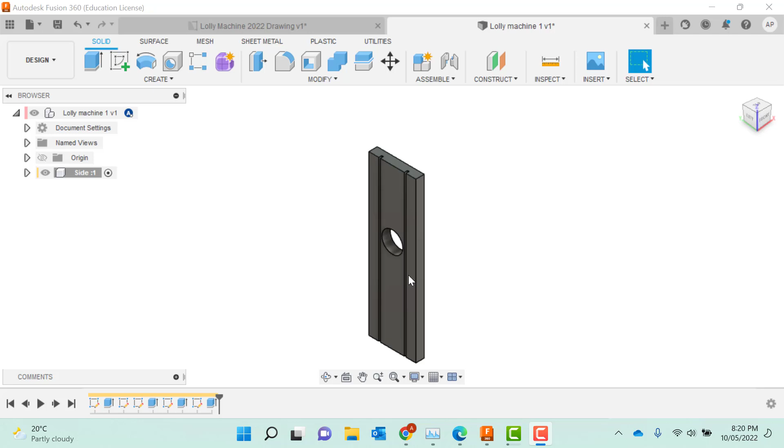Right, now that we've drawn this side, we want to look at using the construct offset plane and then the create and mirror tool to draw this whole piece, the two sides.

To start with, we go to Construct, Offset Plane, and we select what face we want to base our offset plane from. We'll select the inside where the grooves are.

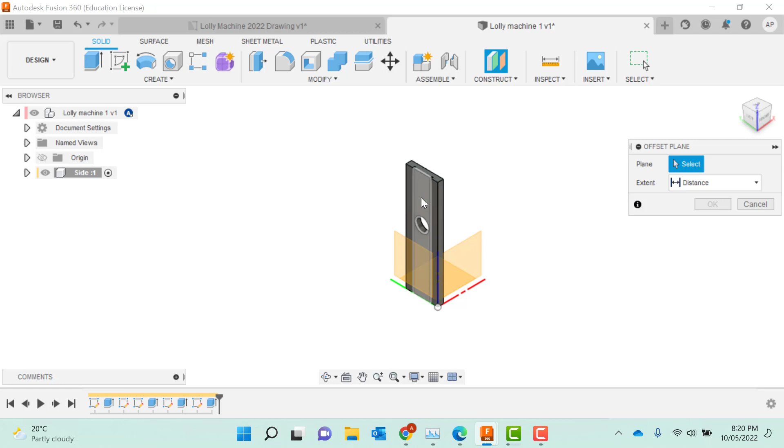Now the entire piece is going to be 200 mil. If we look at our drawing, from that edge to that edge is 200 millimeters. Some of these drawings have been moved around, so that may not show it clearly. But we know the two thicknesses of our job is 16 mil, so two 16 mil pieces is 32 millimeters together. 200 minus 32 brings us to 168 millimeters, and dividing that by 2 is 84. That's the calculation we need.

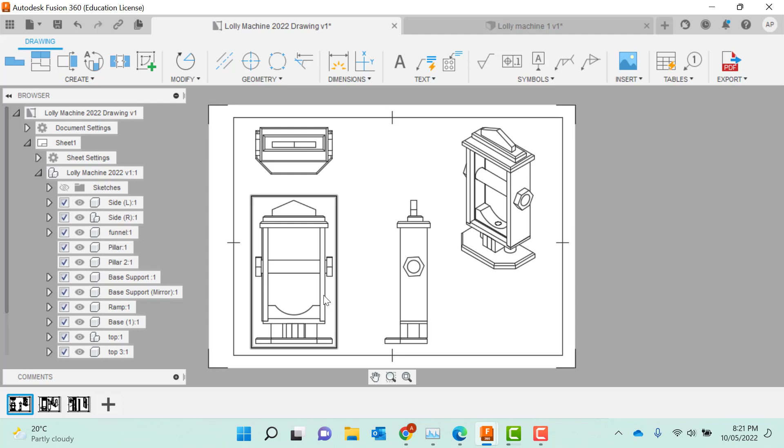So when you're drawing with Fusion, it's often handy to have a piece of paper next to you to work that out. With that, Control-Z, Construct the Offset Plane. I want to base it off that face, and I want it to be 84 millimeters away. We'll say OK.

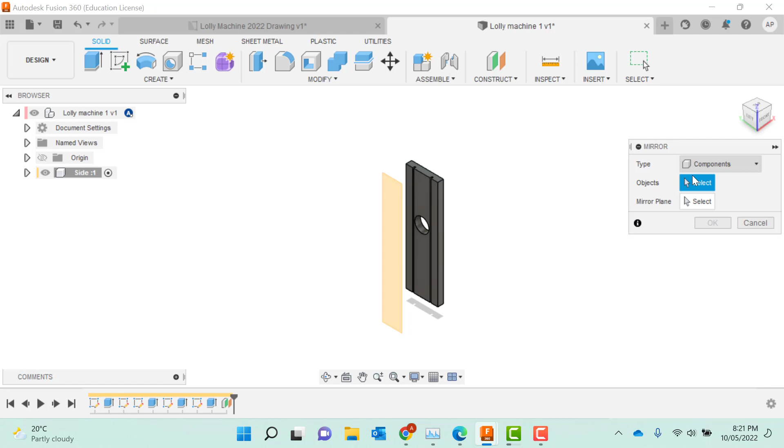I go to Create, and I want to Mirror. This requires that we have components set up—if you haven't created a component by this point, this will not work. So we select what component we want, and that's this side. Then which mirror plane do we want to use? This one. We say OK.

Now it does get a little bit dark, you can't quite see all the bits, some of it's undone. Go to the top of your tree and select that circle—you'll now be able to see both parts. Orbit around if you like and have a look, and there's the two sides.

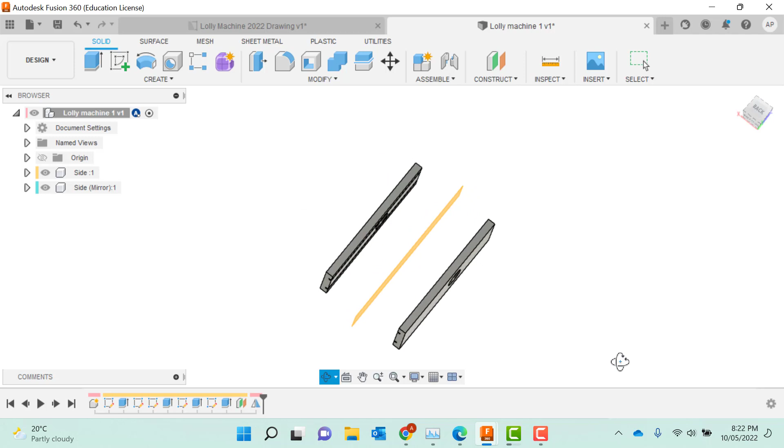Use the orbit tool—sometimes it's hard to see where you were supposed to be again. Go back up to the top, and we select the picture of the house. Now we go back to that right view, and the side is mirrored.

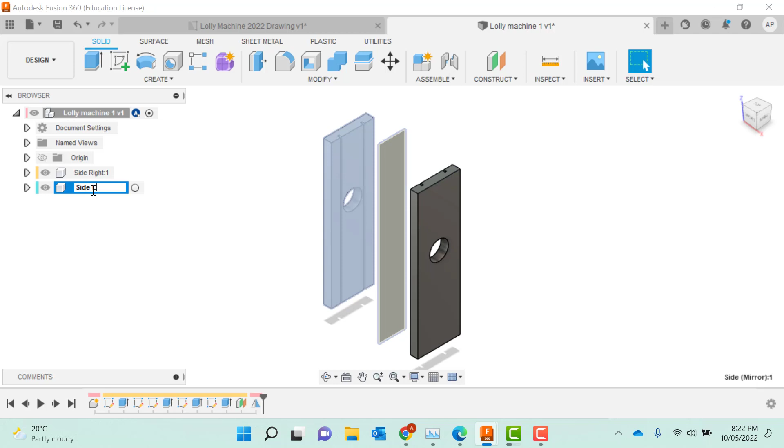So you might go back up into this and rename that side 'right', and instead of being 'side mirror', let's change that to 'side left'. So we now have our two sides of our job.

We now want to create the base, so create a new component—we're not going to call it component 3, we'll call it the base. Tell that OK, and again it goes whited out.

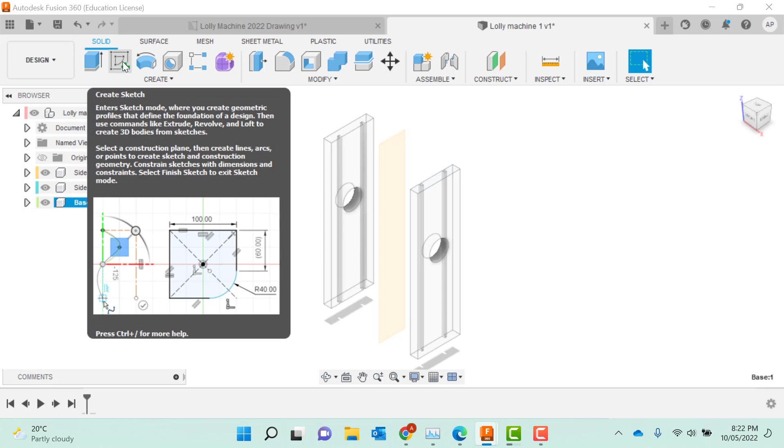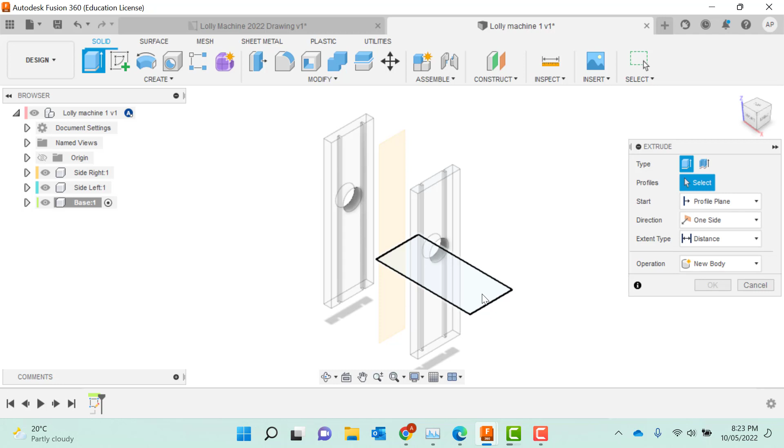Finish sketch. I'm now going to extrude this to 16 millimeters. I can see I've placed it on the other side, so I can turn that around, and I'm going to need to put those grooves into this one as well.

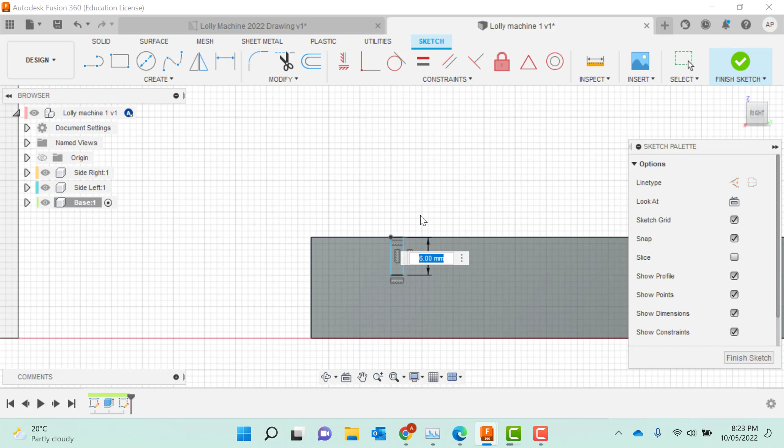So I'm going to sketch on edge, get my rectangle, zoom in, make sure I click on the edge, use the dimension tool—this is 6 mil, wonderful. Fusion does remember common measurements. Using the dimension tool, the width of this I want to be 3 millimeters, and I want this to be 19 millimeters from the edge.

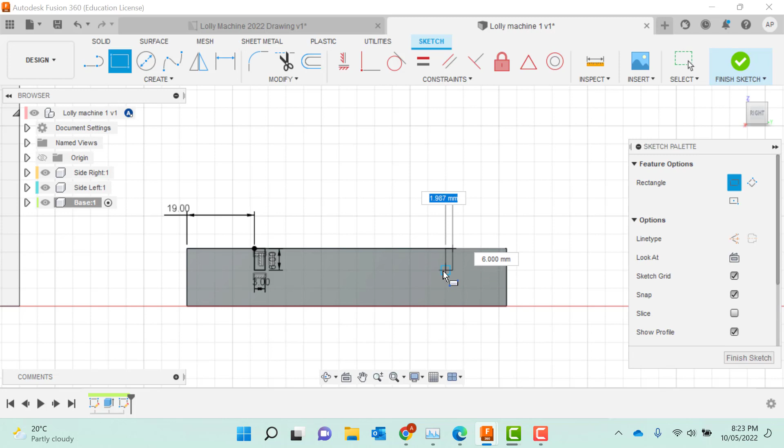Now with this, we'll draw both and see if our trick of extruding two at the same time is going to work. We can try and drag it to the right size, dimension to 6 mil, and set the width.

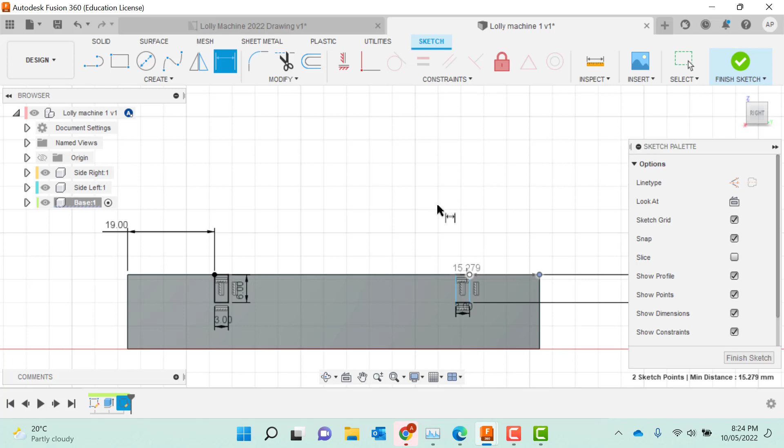I'll zoom in a bit more to make this easier. Now dimensioning the width of that to 3 mil, and we'll go from that edge to the edge of the drawing, which we said is 19 mil. So I've now got the two rectangles drawn up.

I'm going to select extrude, select that one face, hold down shift, select the other one, and this is 200 millimeters long, so I'm going to minus this 200. Now I can see that I have my two trenches in place.

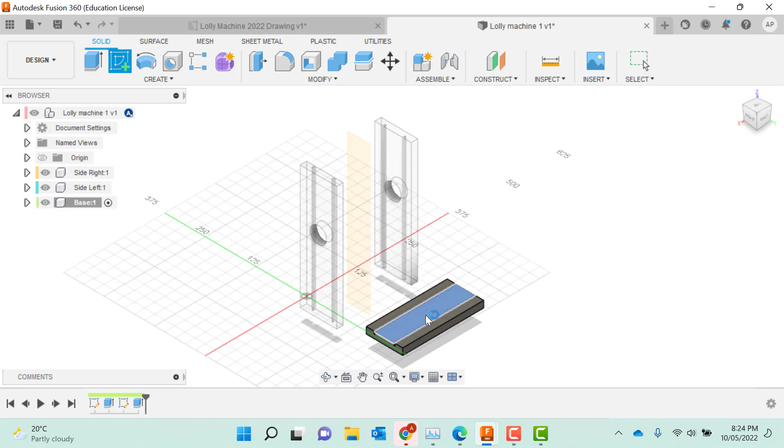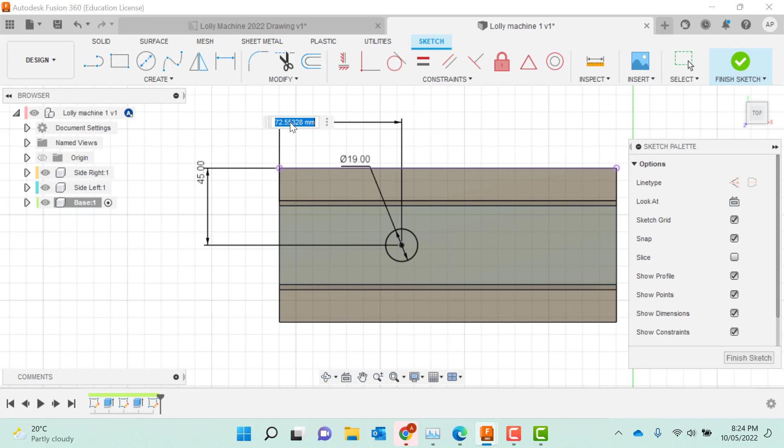Click on that corner, come back around, and there's one more bit of drilling to do - I'll drill a 19 millimeter hole. So I'll draw my little circle, use the dimension tool, drag that out 19 mil. My piece of timber is 90 wide, so I want it centered at 45. The whole length of this timber is 200, so the center is going to be 100.

Finish sketch, extrude, grab the circle, minus 16, back up to the picture of a house, and there we go. So the last thing we're going to do with this is joint these together.

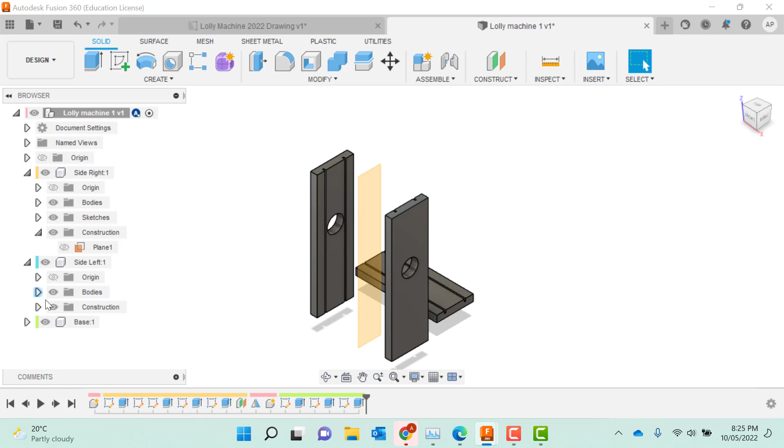To do this, I like to have everything selected so I can see it all. That yellow section is the construction plane. If I go to the right hand side and find construction, I can turn that plane off. Same on the left hand side, find construction, turn that plane off. So if it does annoy you and you want to move it, that is possible.

Alright, so we're now looking at this tool here called the joint tool - you can press the letter J and it will bring that up too. We want to select a face. I'm going to select just that top corner and I want it to go into that corner there.

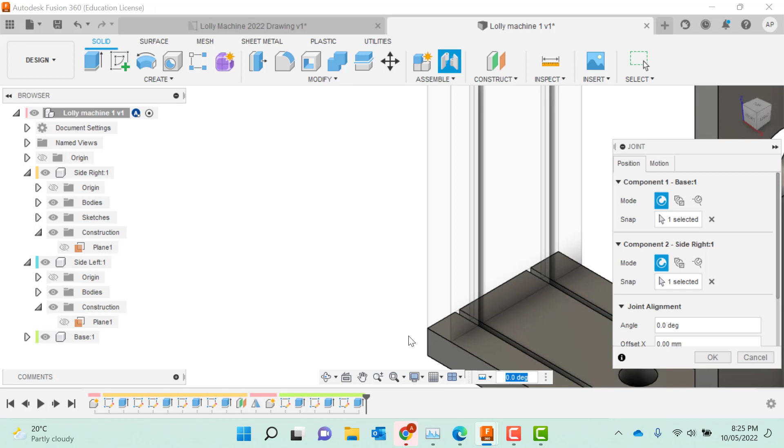This will be very fiddly when you're doing it for the first time. So it's right up into that corner, which is good to see, and down into that corner there. So what I'd now like to do is move this up by -6.

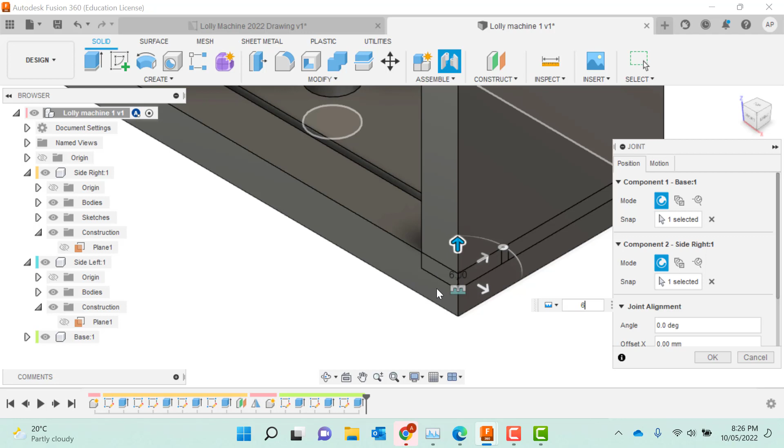It's already going up, so I'm not going to go -6, I'm just going to go 6. You can see how this is actually going inside that bottom piece of timber. This is the starting of a rebate joint.

Now what we do is select the combine tool, and you want to make sure it's set to cut, the target body is the base, and the tool body is the upright. So the upright is cutting into the base, and we say OK.

What I didn't do - go back to this step, very important - we want to keep the tool. The target body was the base, the tool is that upright, and because I previously didn't have keep tool selected, it deleted the tool, which is the side. We don't want to do that.

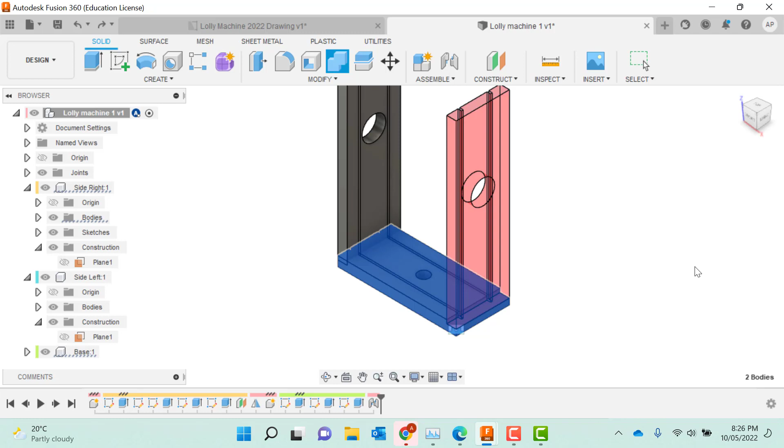So now when I do it, they both remain - it's thinking - and if I turn off the right side, you can see how I've cut into this piece of timber. So I haven't had to draw that, I've used the geometry of what I have there.

So let's do it over here. Combine, the target is the base, the tool is the upright. It's remembered that I just said keep tool. You say OK, and there we go. So if I turn off the right and turn off the left, you will make that piece of timber.

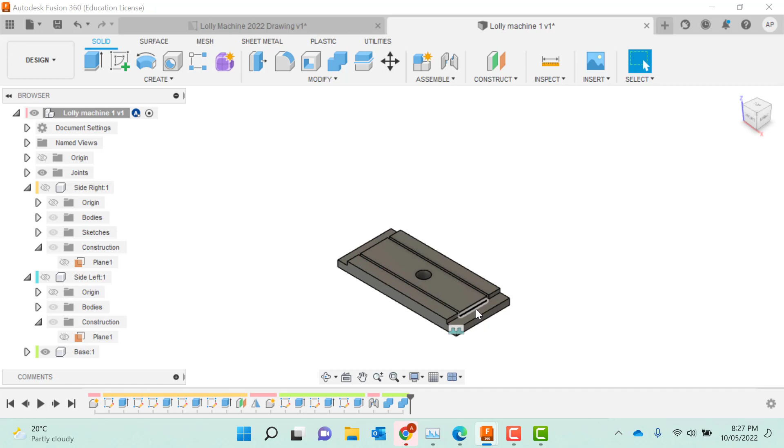You'll cut it down to size, use the chisel, mallet, tenon saw, and cut out that rebate. Do the same on the left and the right, mark it up, use the Forstner bit, use the drill press and drill that hole, and you'll receive those trenches - they'll be cut by the table saw. So there are the first 3 steps of drawing the lolly machine.